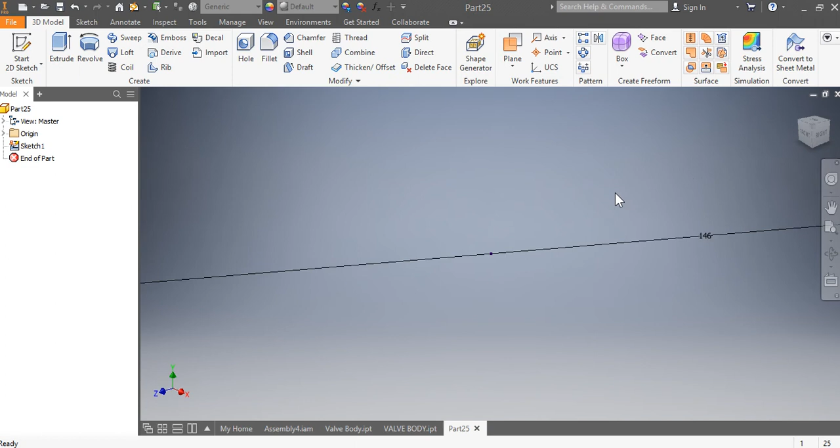Okay, the part that we're going to do is the valve body. So start again with the 2D sketch on the XY plane and create the circle, which is 146 mil, and extrude it to 12.

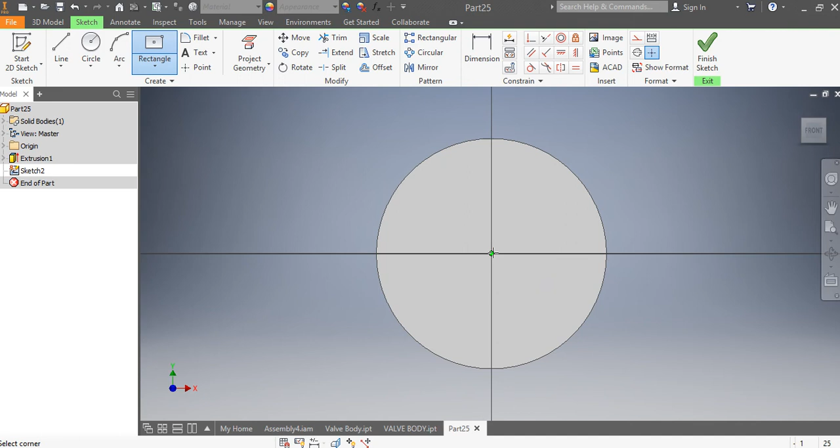Okay, so on the front, start a sketch, and on the drop down of the rectangle, click on the 2-point center, and it will be 146 tab 40. Do another one this time, but vertical, 40 tab 146.

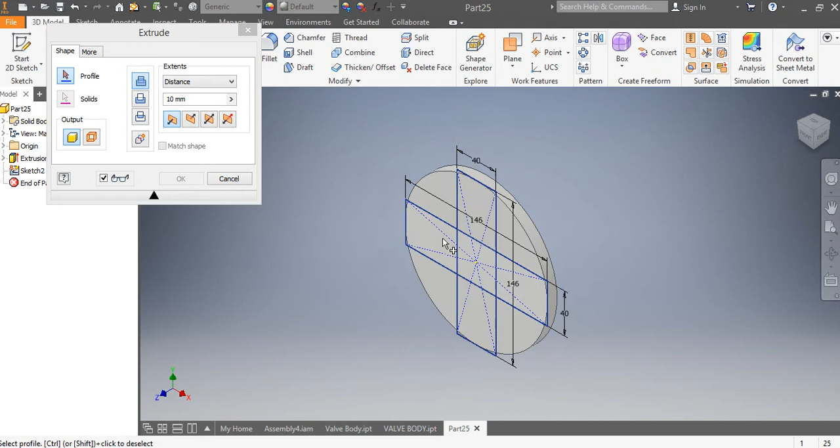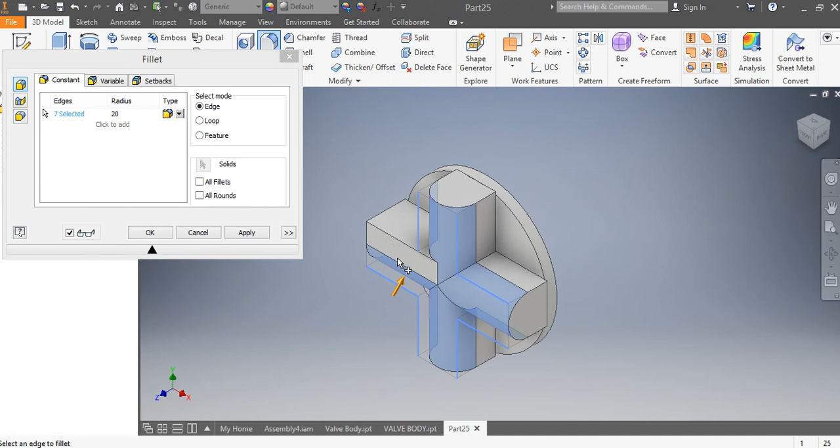Finish sketch and extrude both rectangles to 40 mil. This time fillet. The fillet of those are 20. Click all the sides, corners, and press OK.

Right, we're going to do now those cylinders. So that is 11 from the top here. We're going to offset the plane from this side. Click and drag it to the other side, so it will be a minus number. So it is 11 plus 12 plus 40. That is 63. So minus 63.

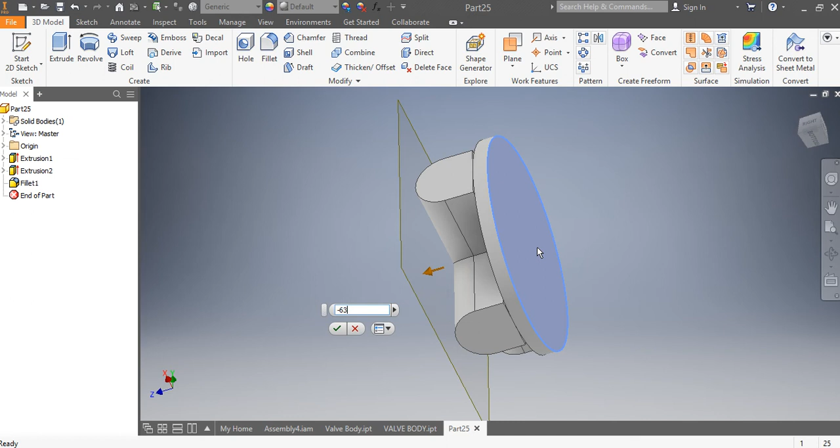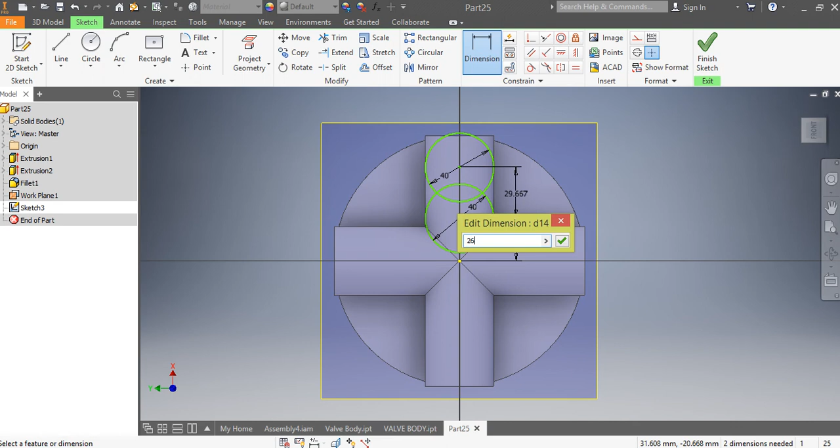Okay, and start a sketch on that plane, or plane 1. And I will start doing the cylinders. That is 40. And that is 25 away from this center point. And that one, center to center, is 26. Sorry, it will be horizontal.

Now, I can probably, right, let's try. I can probably do the pattern, but I'll just do it manually. No, it will take longer.

Again, make sure you align them to the center point and the last side. 40mm diameter.

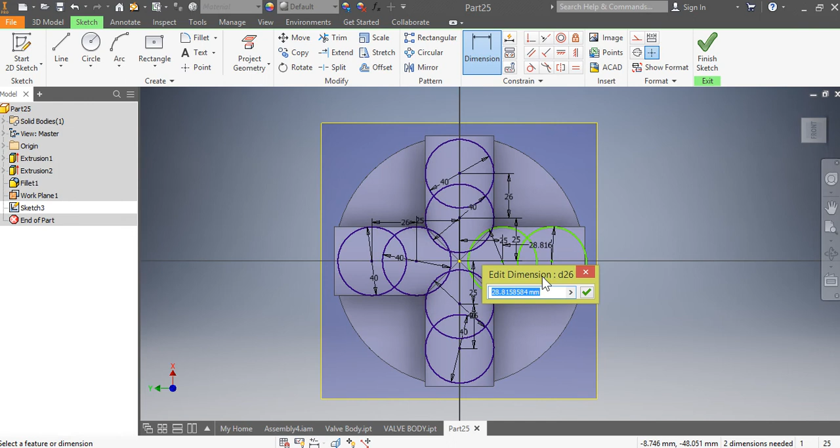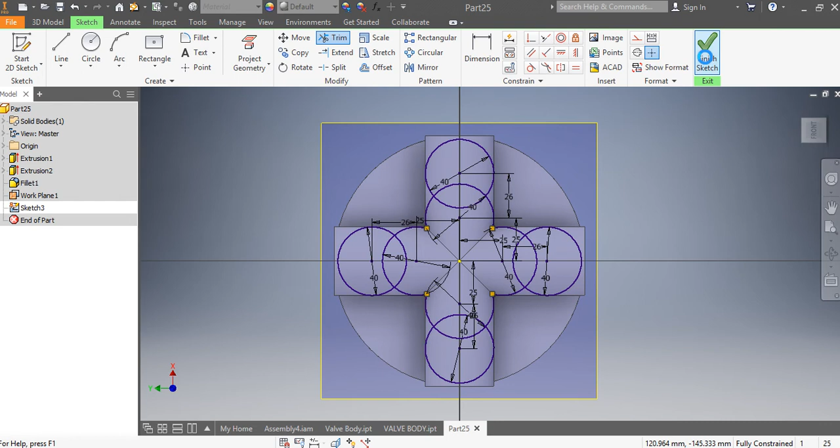Okay, I can trim this with this. Okay, and just, I'm not going to trim the others. I'm just going to now finish, and just make sure when you extrude, make sure you get all those circles, and click on to next, so it will attach to the next body, and press OK.

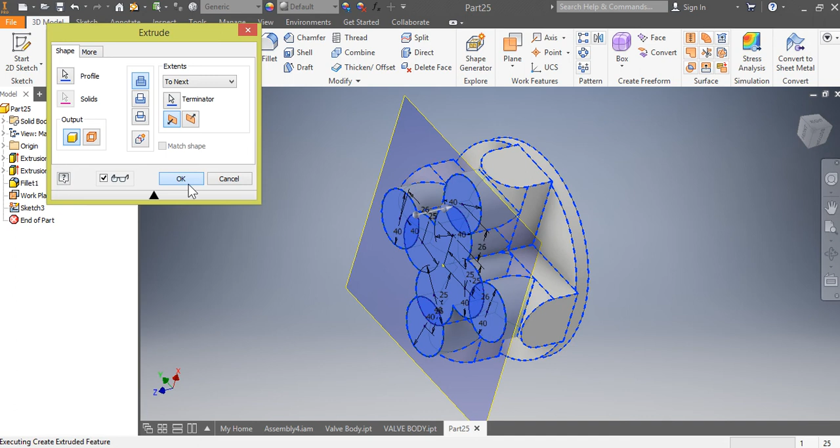Okay, so it will look like that. So it attached to the existing body, and now we can just right click on the plane and click on visibility, because we don't need that anymore. Okay, so

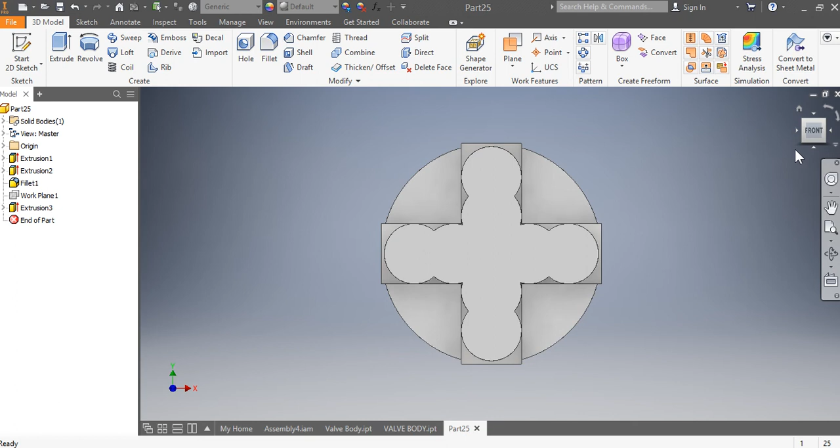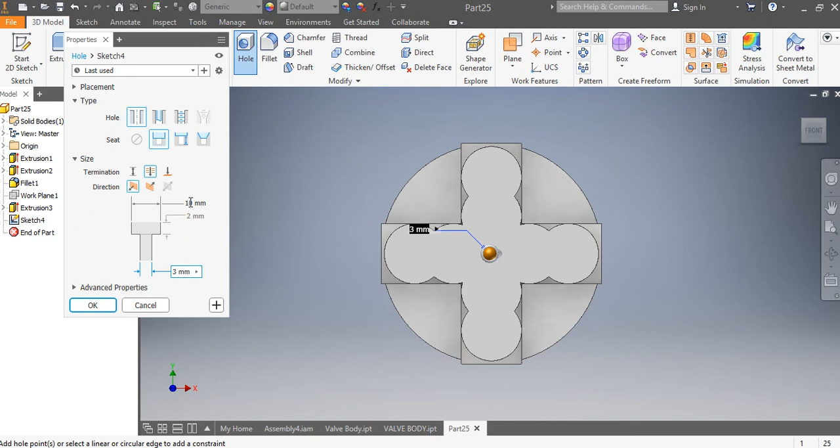Okay, so click on hole and click in the middle, and we'll use the simple and the counterbore, and instead of 10 it is 24, instead of 2 it is 20. Oh sorry, not 20, it is 10, and it's not through all, so it's distance, and that one is 30.

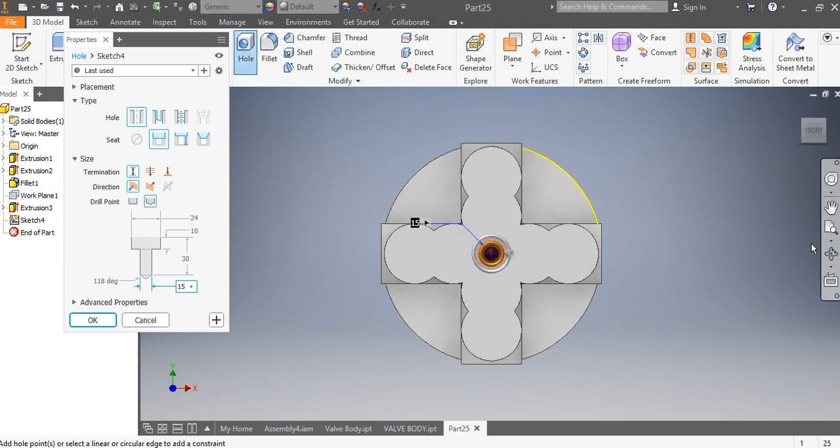And the bottom hole, sorry, smaller hole will be 15. To make sure it is in the center or concentric, click on the outer and it centers itself, and press OK. And also now you can click on thread, because this part is threaded. Okay, and press OK.

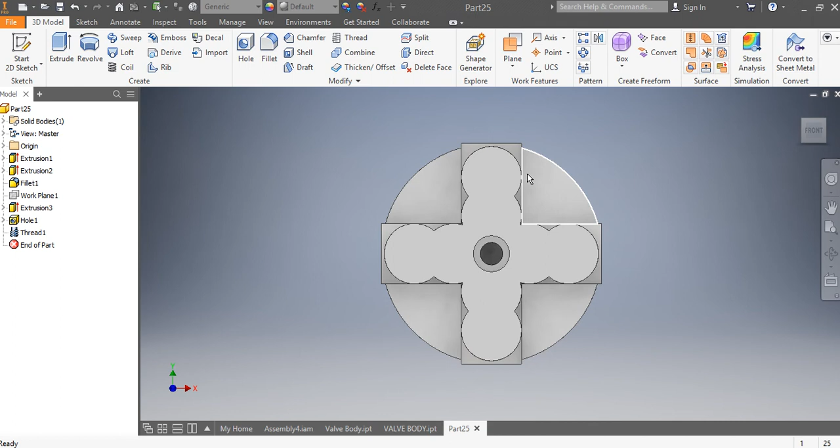So we'll do this top bit. So hole again, click in that surface and make it concentric, so it is concentric, and that size is 22 instead of 20, so the bigger hole is 22.

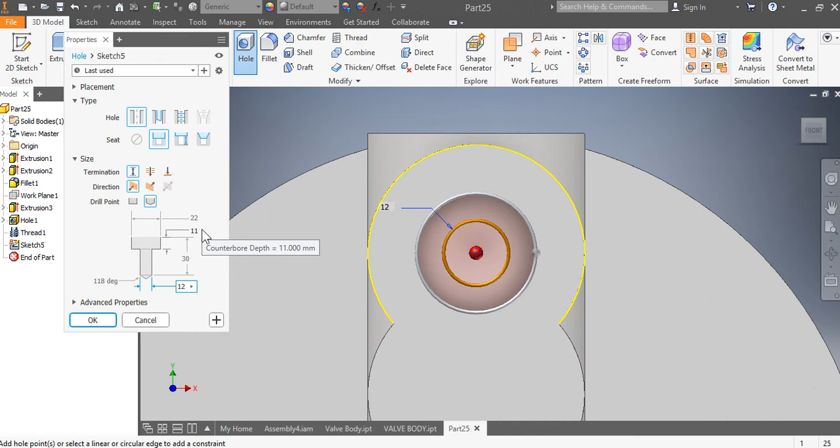And it is 11, and the total length is 30 again, and the smaller hole is 12. Make sure it is in mil. So 22, 11, and 30 and 12. Yeah, and press OK.

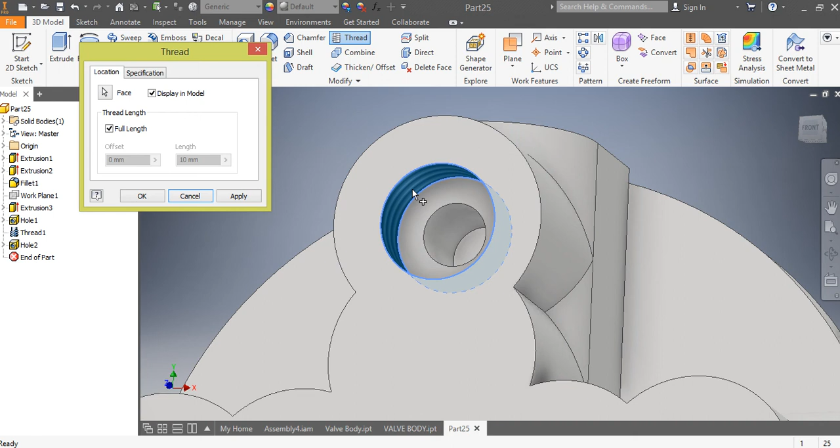Right, hold on, let me just check. It should be flat. So edit feature. Right, so the drill point, it should be flat, not angled. And press OK. And then thread this part, which is M22 times 3. Yeah, that's it. And press OK.

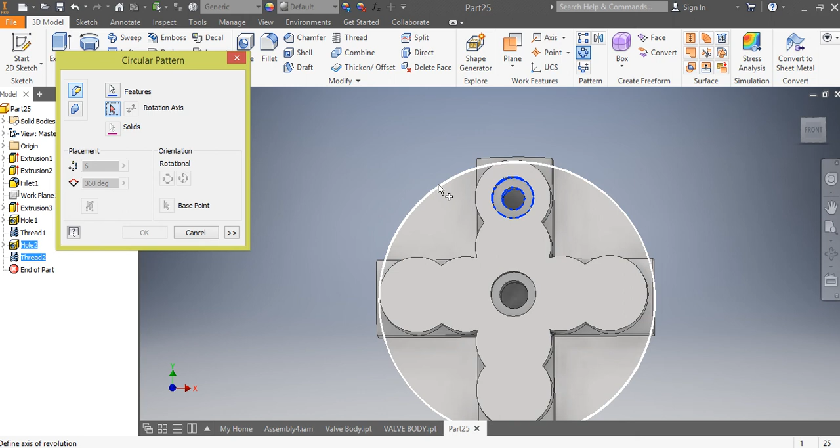So after that, you can just click on circular pattern, click on the hole and the thread. You can use the browser or you can click in here. I always find it easier to look for the features that you want to pattern using the browser. Click on the rotation axis, which is the red arrow there. Click the outside circle, and we'll need only 4. Press OK.

Okay, the smaller hole is M20 times 1.5, and there's a hole, a through hole, M20.

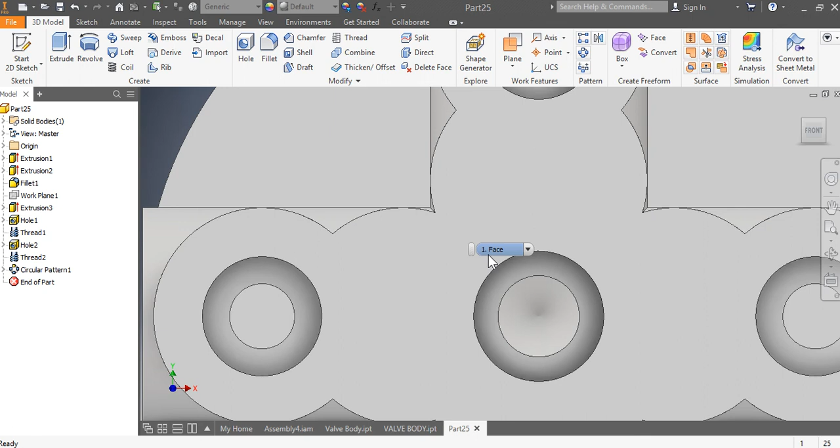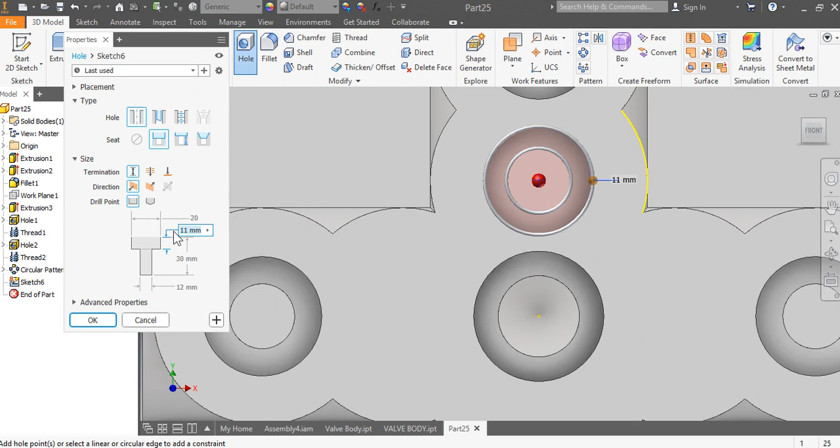Okay, click on hole again, click on the surface, and click on the outside arc to make it concentric again, and this time it's only 20, and this one is right, this 25 mil, and this one, sorry, it will be through all, so this through, and this one is 10.

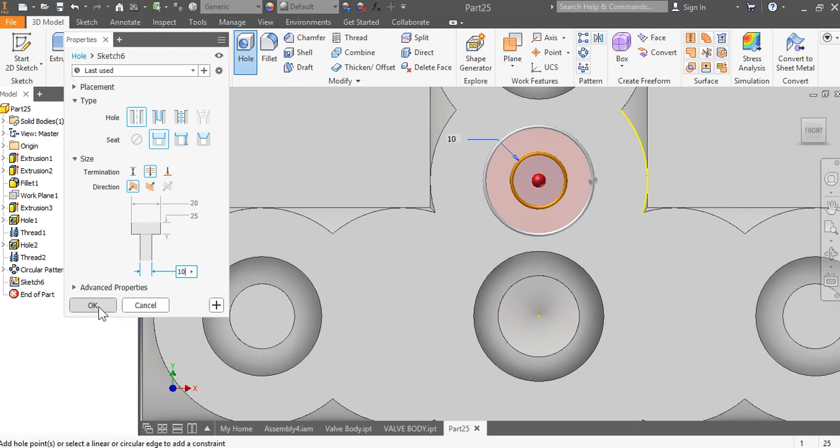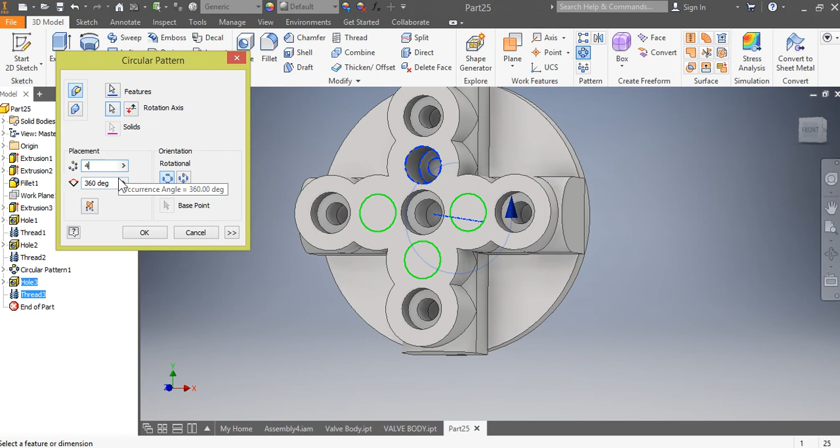Okay, and thread specification, so it is only 1.5, so change the designation to M20 times 1.5 and press OK. Use the pattern again to click on the hole and the thread, rotation axis, outside circle, change to 4 and press OK.

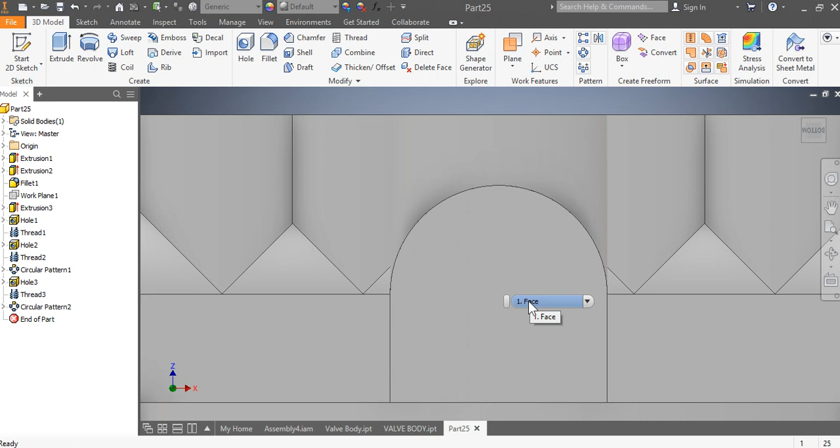Yeah, so those cylinders are now complete. We'll now do the hole here. So there are 2 holes on top of each other. So the first hole will be... Okay, so hole, click in this surface, click the outside arc, and instead of 20 it's 24.

The depth of that is 10. It's not through all, so click on distance, and overall is 28, and inside smaller hole is 20. Okay, and press OK.

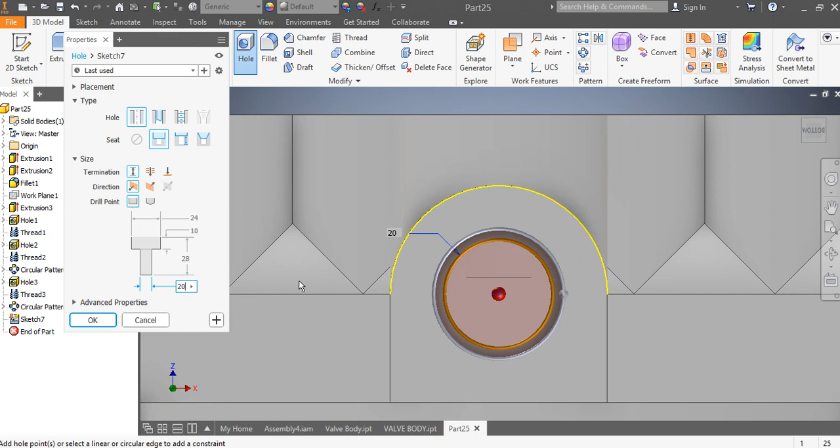Let's just check again. I'm just going to double check if it's flat or angled. Edit feature. Okay, yeah, it's flat, so let's press OK.

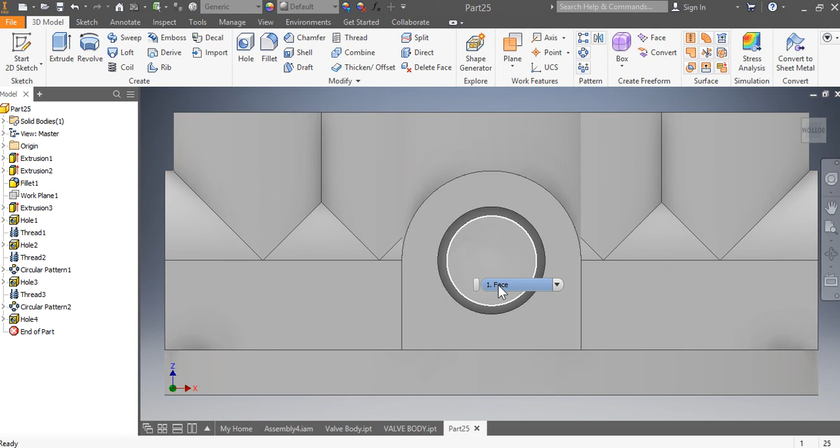Since it's flat, we still have that surface, so this hole within that hole is, so click on hole, click in that surface there, and click the outside arc to make it centered, and now change that, so it's not a counter bore, it is a countersunk.

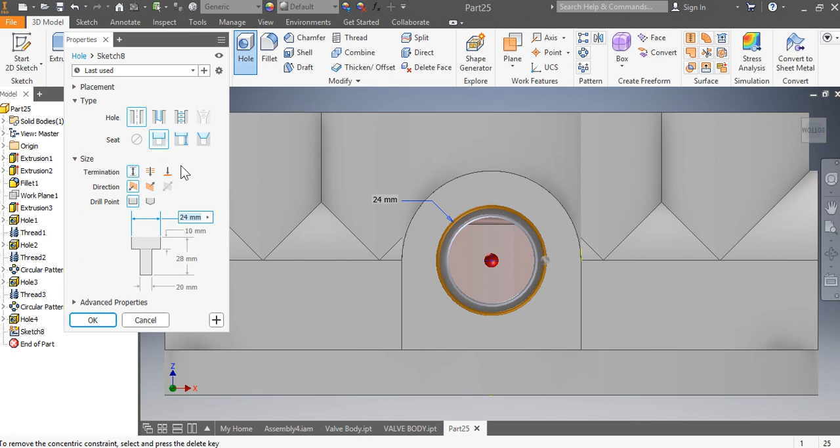So outside diameter is 16 and it's 60 degrees and 20, and smaller hole is 12, and this time it is drilled. Yeah, so 16, 60 degrees, 20, and 12. Press OK.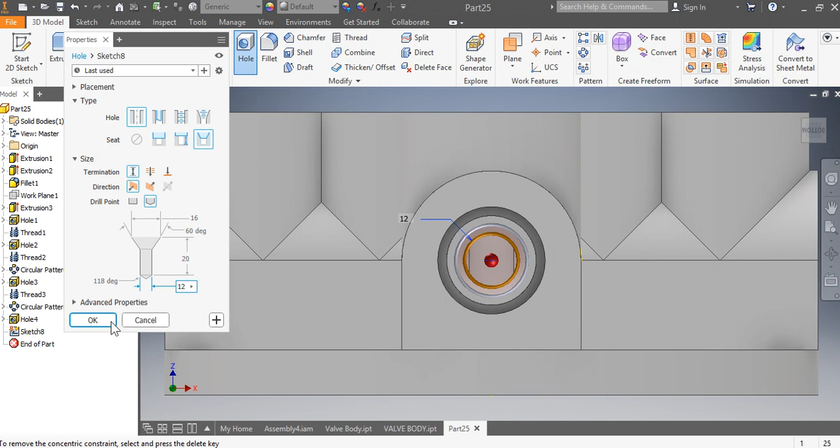There you go. And now we can start thread. Click on the outside, sorry, the first hole there. And what is the specification? Yeah, 24 times 3, and press OK.

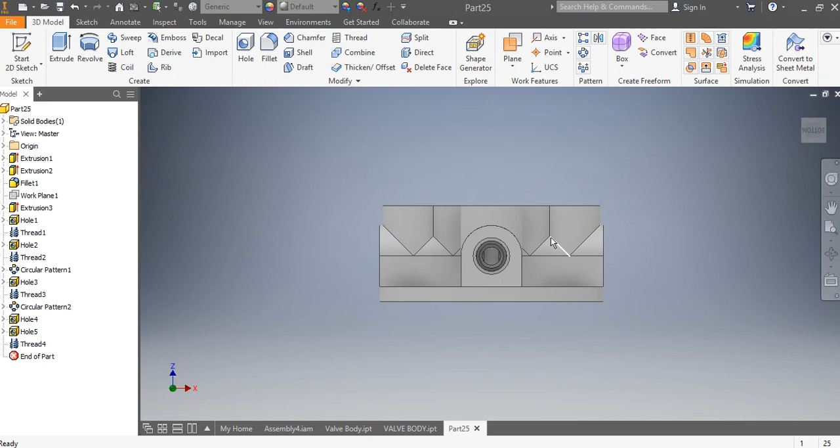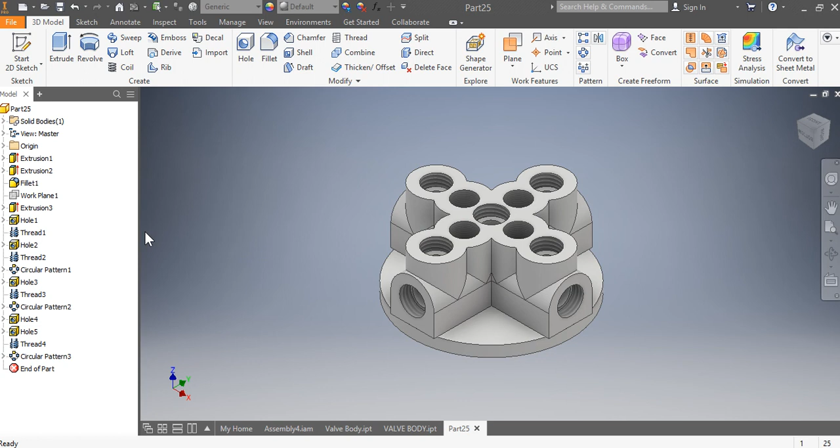So this time you can now start pattern. Click on those two holes and click on the thread. So three things you need to pattern. Click on the rotation axis, click on the outside circle, and 4. Press OK. Okay, so those are the holes.

Right, so now we will need 2 holes on each of this. So let's start a sketch. It should match the end valve, or an end plate. Yeah, no, end plate.

Start a sketch on that surface, and now if you want to press F7 to make sure that you are on that, yeah, that's it, and click on line, and then click on your guideline, construction lines, and click on the yellow dot and just draw a horizontal line to the right.

Do another one which is angled, and line again. Make sure that you are clicking on the green dot. After that, you can now dimension.

Click on that to the horizontal line, and it's 30 degrees. Another one is 30 degrees. And the PCD is, so click on circle, make sure on the green dot on the middle, and the PCD is 128.

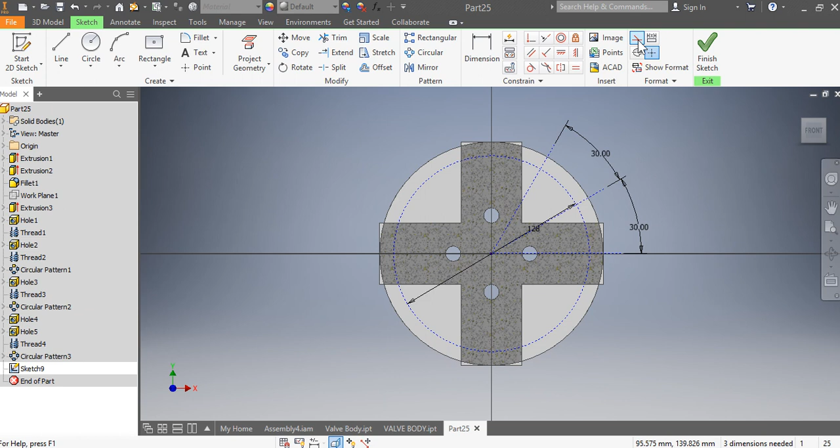Okay, so remove that guideline, and this time click on point and click on that intersection of the two of the lines in the circle. Click, so you got 2 points, and finish sketch.

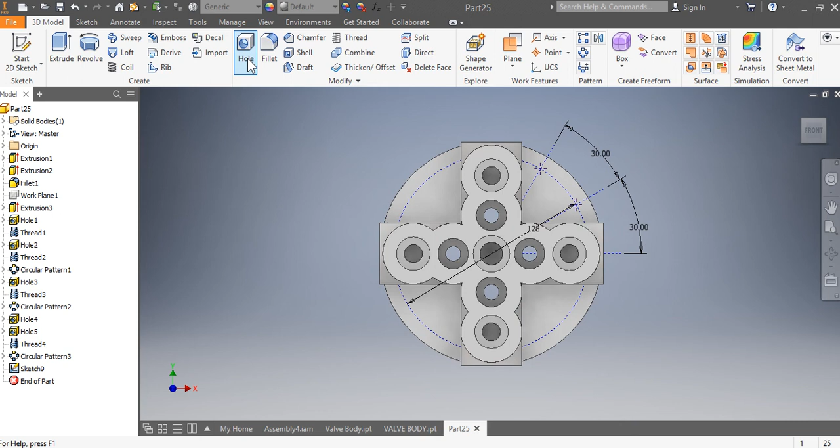So now you can click on hole, and the hole is, it's a threaded hole, and it is a countersink, and if it's threaded, just make sure it is an ISO metric profile, and it is an M8, yeah, M8 times 1.25, and the bigger hole is 10.

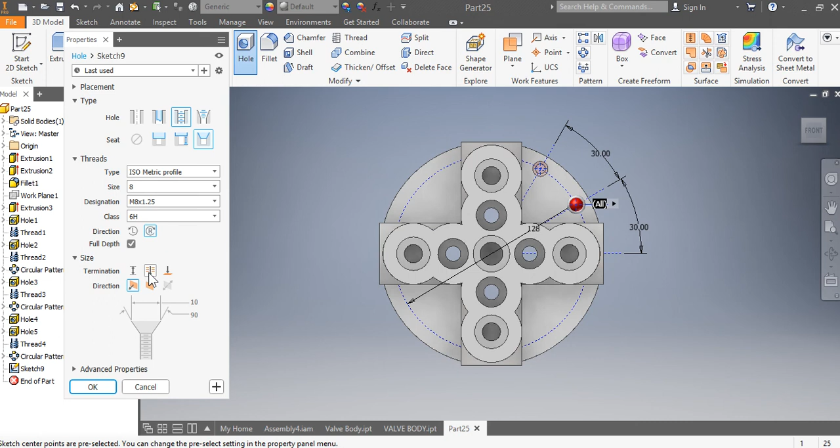And instead of 60 it is 90, and it is a through hole, and it's full depth, yes, and press OK.

So we got those 2 holes, and we'll now need to do the pattern again. Click on that hole, click on the rotation axis, which is the red arrow, outside circle, and put 4. Press OK.

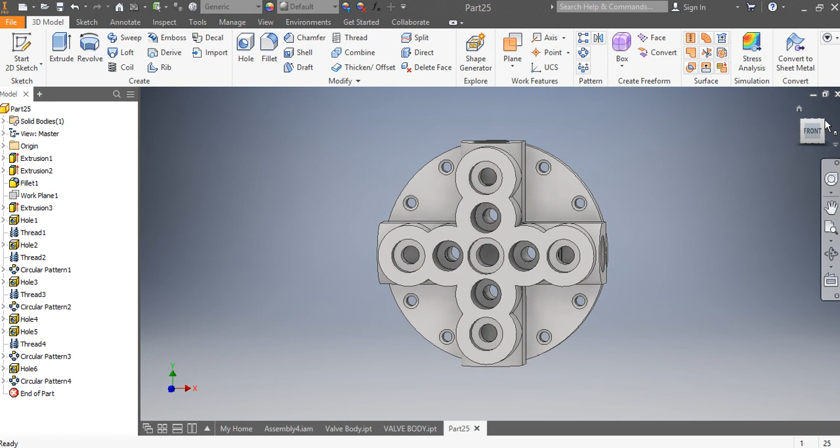Okay, so turn it around. There you go. And there is a hole in the middle, which is, what was the size of that?

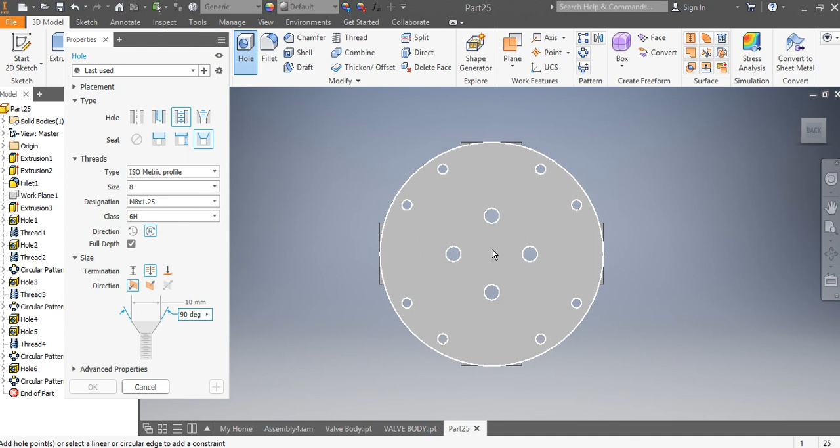So I'm going to click on hole, click on this again in the middle, make sure it is a simple hole and no seat, and the size was, I think it was 22.

And it's not through, so we will click on distance, and it is 13. So to make it centered, click over to the outside line, outside circle, and click. It centers that, and press OK.

Oops, it looks like it has been angled, so I'm going to right click again, edit feature, and make it flat. Press OK.

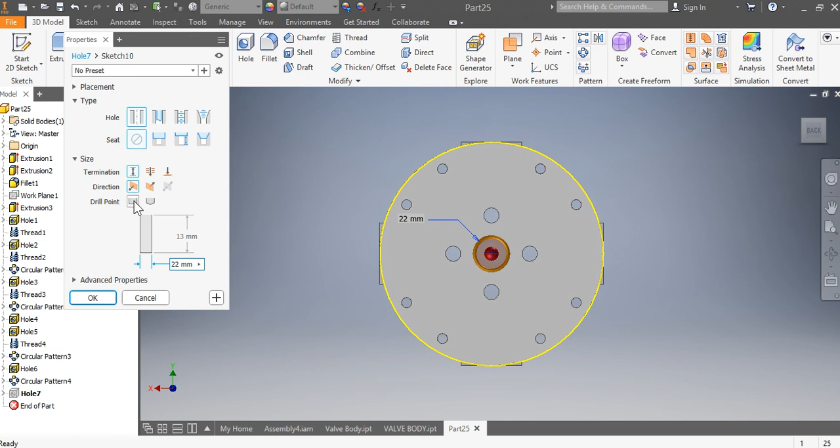Okay, so now the next one is, I'll start a new sketch here. So there is a, okay, there is a 96, and can I see? What's that? 82, 96 and 82. 96. And the next circle is 82.

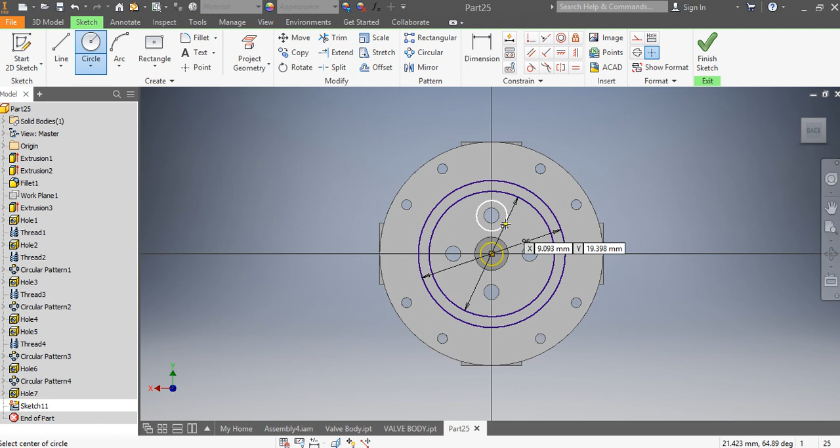Finish sketch and extrude. Just extrude that part, and it is only 3 mil. Press OK.

And I think this is the last bit. So start the sketch again, click on that, and we will just project because the holes are already there. So click on project, click this circle and the next circle.

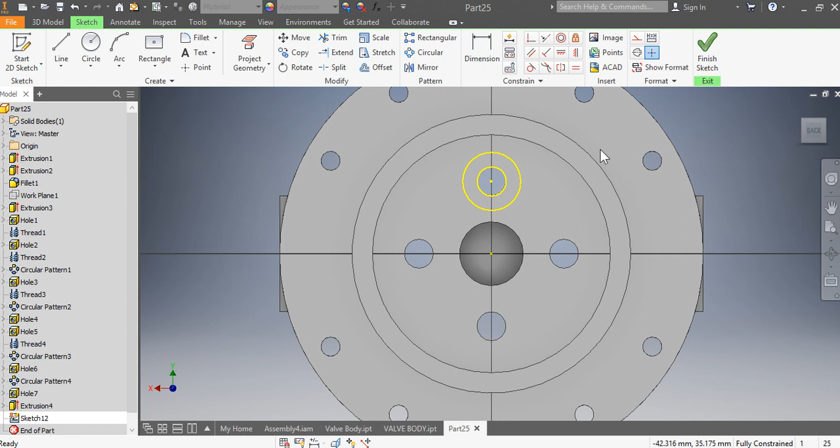Okay, just to make sure, I'm just going to dimension. Yeah, it's 20 and it should be 10. Yeah, that's it. And finish sketch and extrude that part, and it is,

What is that? It is 8 plus 3, so 11. 11. Yeah, and press OK.

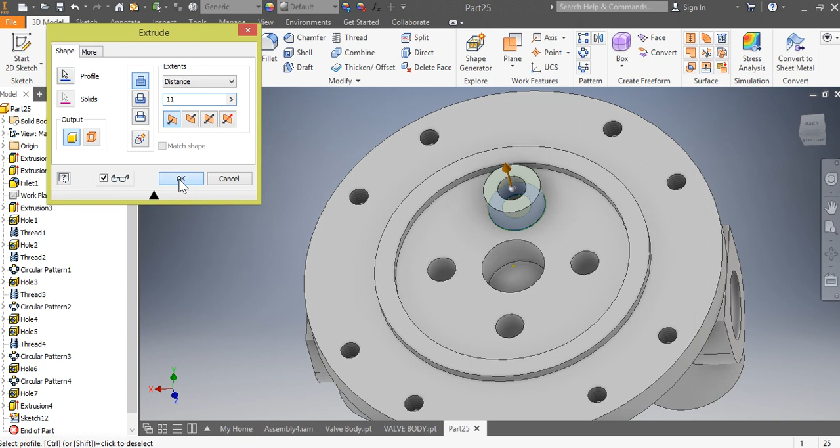And now pattern it again. Click that and finish. And we only need 4, and press OK. So there you go. That is your valve body.

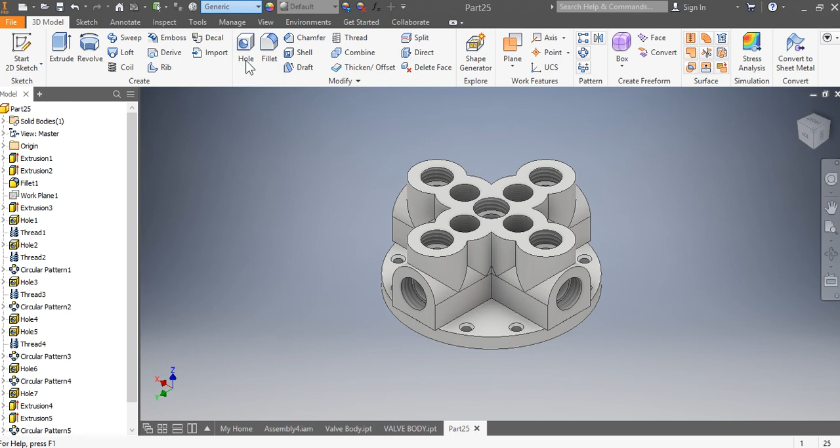Just change the material to, what was the material? I think it is aluminium. I'll change the color to a different color. What did I use before? I'll use that nickel. Okay, and file, save as valve body,

Valve body, and save.